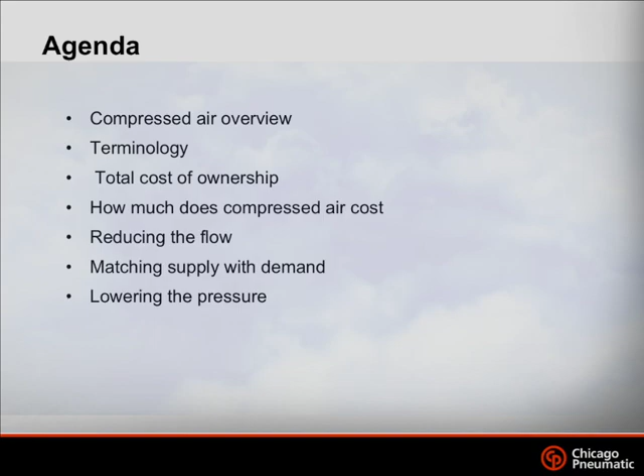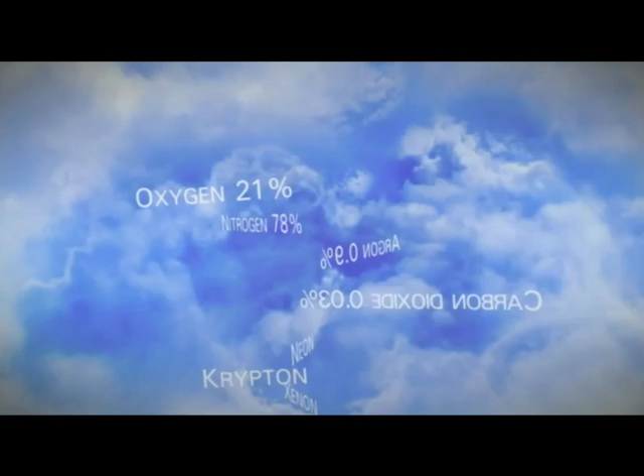Air is composed of 21% oxygen, 78% nitrogen, 1% gases such as argon and carbon dioxide, and minute amounts of trace gases. Together, they form air.

Because of their low density, gases such as air can be compressed, unlike liquids. Compression forces the air molecules closer together, increasing the density. Air pressure can be expressed in pounds per square inch, or PSI.

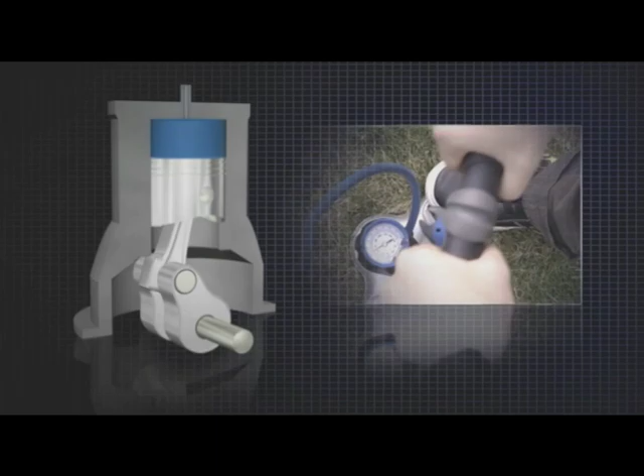The first way to compress air is by displacement. This means enclosing an amount of air and reducing its volume, like in a bicycle pump or a piston compressor. The air volume can be reduced in other ways as well, by rotating screws, gradually decreasing the space between them, or by tooth-type screws or scrolls.

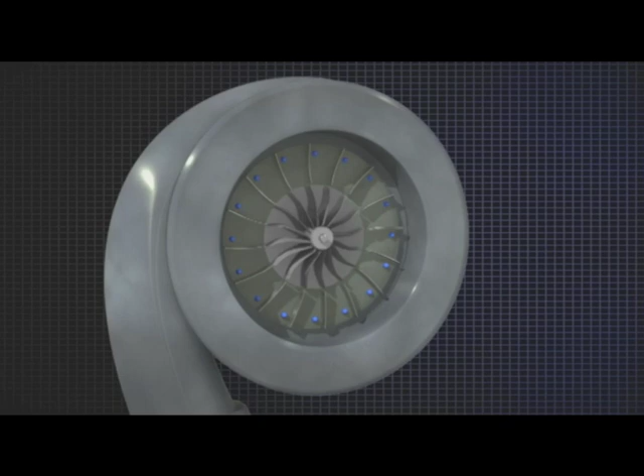A second way to compress air is dynamic compression. Air is drawn into a rapidly rotating impeller and accelerates. The kinetic energy is then transformed into pressure as the air slows down by expansion.

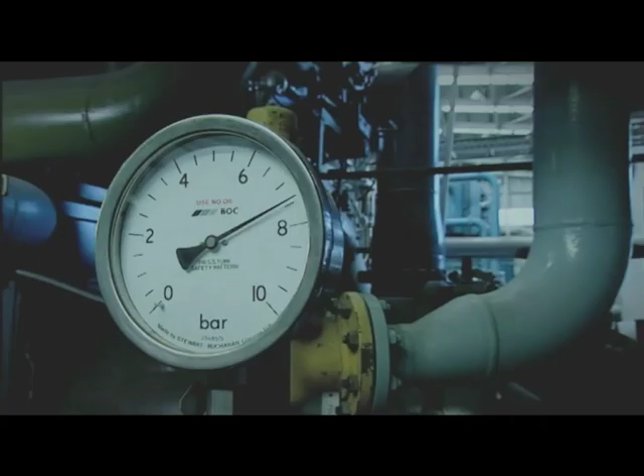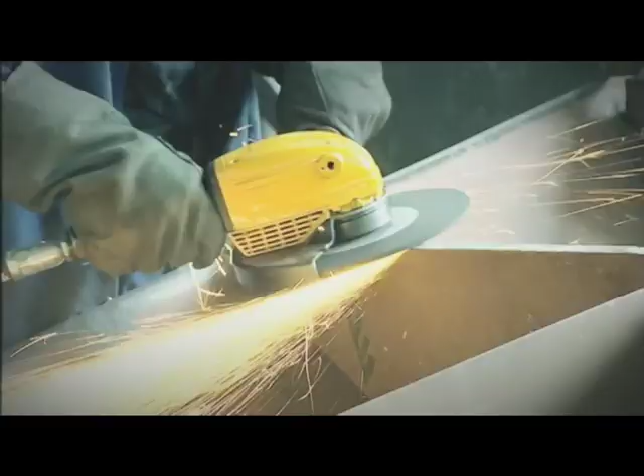Compressed air is a useful resource in virtually every manufacturing process. It can produce motion and exert force, such as in pneumatically powered tools or machines. We then call it energy air. It's a main power source on many construction sites, as well as in remote locations, such as drill rigs or on ships.

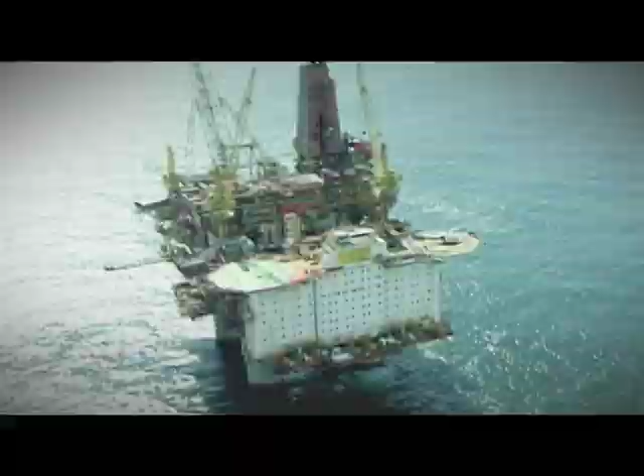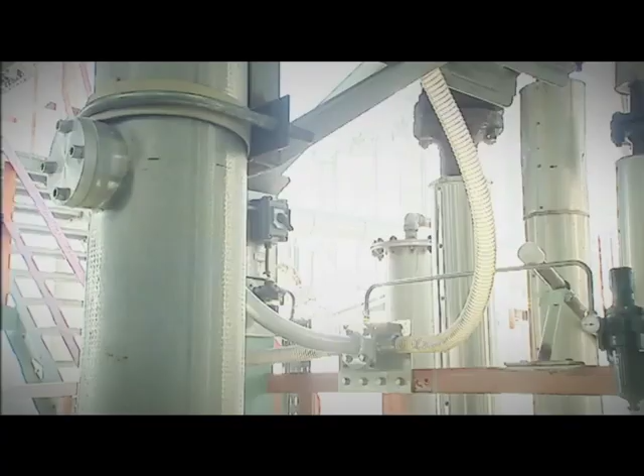It powers braking systems and opens train doors. When air is part of a production process, we refer to it as active air. It conveys tons of powders, pellets, and grains. It's used to maintain pipelines and provides the pressure for cleaning and paint spraying.

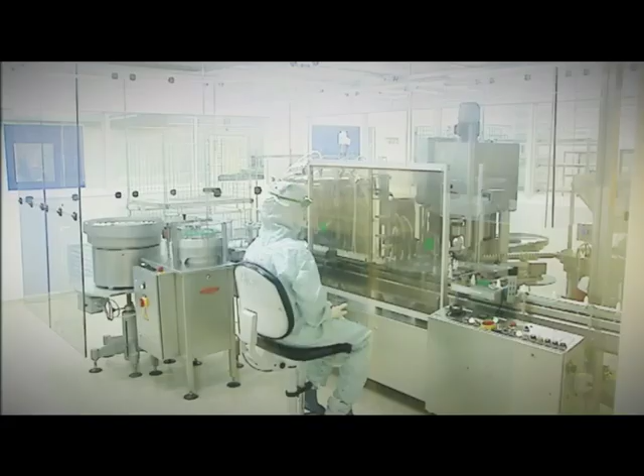Overpressure keeps out impurities from clean rooms and critical production areas. Compressed air is also a vital component in fermentation, combustion, liquefaction, and refrigeration. It's used for gas treatment or air separation. Because the gases forming air are not mixed chemically, they can be separated into oxygen, nitrogen, and argon.

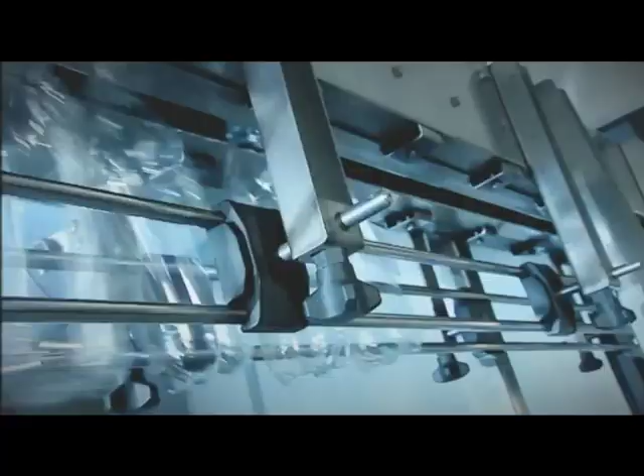Compressed air also provides oxygen to water purification and blows plastics into shape. It helps patients breathe and drives precision tools in a medical environment. In short, compressed air plays a part in countless products and services we enjoy every day.

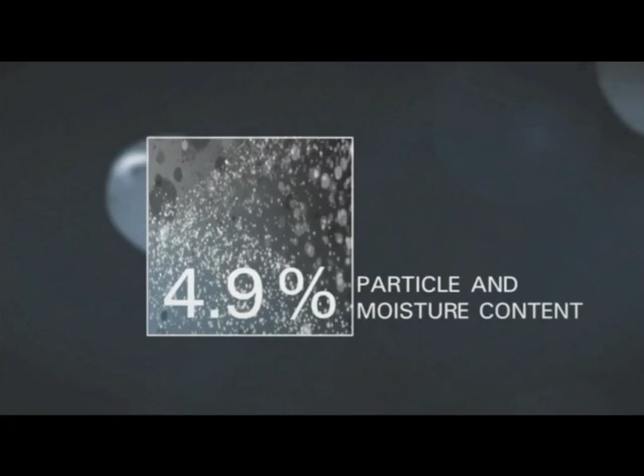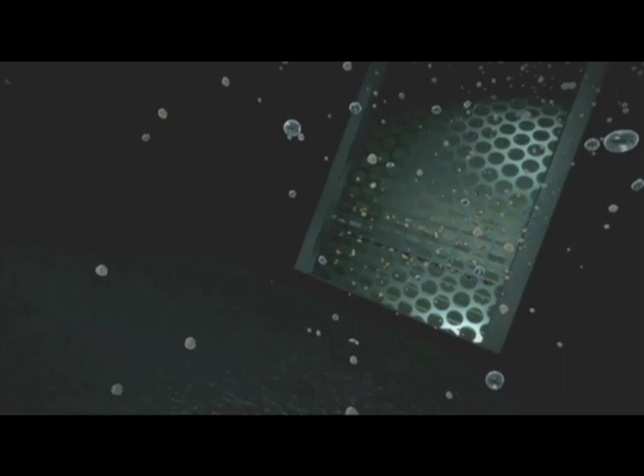Air has a capacity to convey objects. It also conveys very small components such as solid particles, microorganisms, and water vapor. As air is compressed, the relative particle content and humidity increases dramatically, causing water vapor to condensate, potentially leading to contamination of equipment or products. That's why sophisticated equipment accompanies the compressor itself, filtering impurities, draining the water condensate, ensuring clean, dry air of the highest quality.

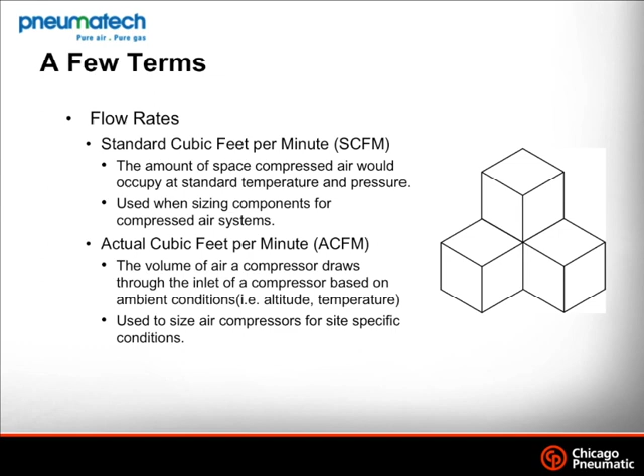But once that air enters the air system, it becomes standard. We convert that to standard cubic feet per minute, and that is how we size the other parts of our air system. We're also going to talk about pressure. System pressure is basically just the force exerted on a compressed air network to perform the needed task the system requires. So that's just fancy for we're using this air to run a sandblaster, or we're using it to paint some components. This is the pressure that we need.

Now, pressure drop, that is a term that we use when we talk about the difference between the inlet pressure at a piece of equipment and the outlet pressure at a piece of equipment. Usually when we're going to be talking about it here, we're going to be talking about the pressure drop across different air treatment devices. So whether it be dryers or filters or any other piece of equipment that you may need to prep the air, regulators, lubricators, that kind of thing.

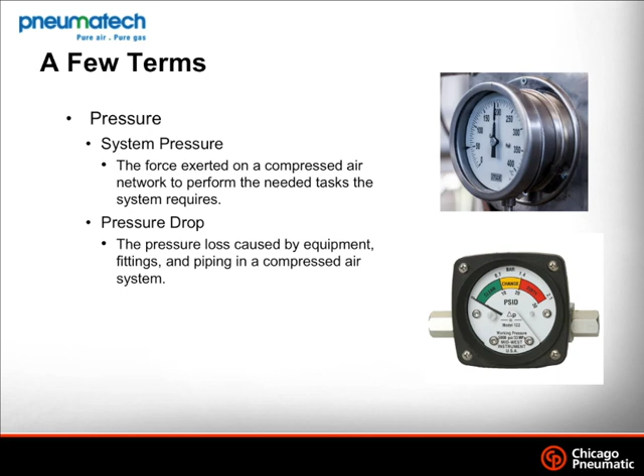Something a lot of people don't know about compressed air systems is that when we start talking about the total cost of ownership, so basically how much does it cost you to own this equipment for the life of the equipment, they don't really realize that 75% of the total cost of ownership is energy consumption. Only 25% then makes up your installation cost, your maintenance fees, and your initial investment. So a lot of times people are a little leery about spending money on energy-saving features because it's of course a little more expensive for those energy-saving features.

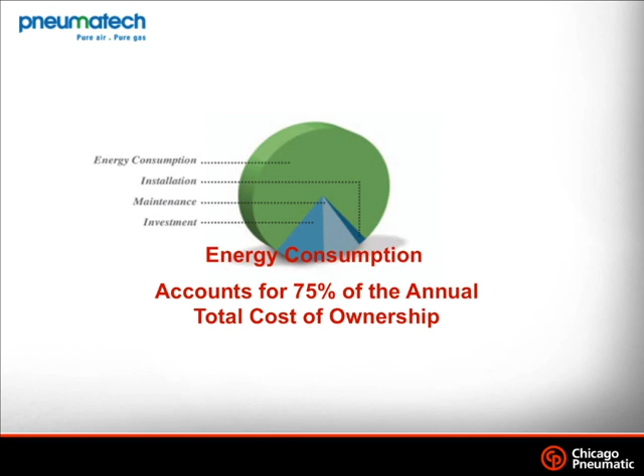But when you look at it over the long-term life of the compressor, you will find for not only the compressor but other pieces of equipment in that compressed air system that you can greatly reduce the total cost of ownership by investing in some energy-saving practices, as well as optimizing your compressed air system.

So how much does compressed air cost? Well, first we need to set some ground rules here. And while every compressor is different, what we're going to focus on are some rotary screw compressors, and as an average, you can use 4 cubic feet of air is produced for every 1 horsepower of energy that you input into that system. So for every 1 horsepower that you put into that compressor, you're going to get 4 cubic feet of air out. Now, just a conversion factor here, 1 horsepower equals about 3/4 of a kilowatt.

One other thing to keep in mind is electricity cost. You'll know your cost for your given area, but the national average right now is about 12 cents per kilowatt hour. It can be lower in some states, and much higher in others. The cheaper the energy, the less the savings, but especially where you're paying a lot per kilowatt hour, energy savings is a huge deal.

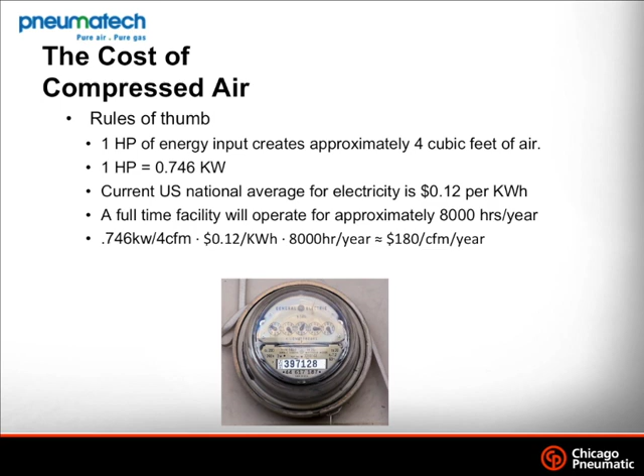In our example, every factory is different, but we're going to look at a factory that operates approximately 8,000 hours per year, and that'll be used for every example. If we crunch those numbers down, we get that each standard cubic foot of air costs you $180 per year.

Now that we've talked about flow, let's talk about pressure and how it affects the cost of your compressed air. We're going to focus on the 100 PSI range of compressors - 100, 125, 150, 175. For every pound of pressure you increase on that system output, you're using about 0.5% of system horsepower. So the higher the pressure, the more energy you need to add to that air.

So let's look at an example of a 100 horsepower compressor running at a discharge pressure of 150 psi. Let's say it's been running at 150 psi for a full year. You take a look at your system and decide you don't really need 150, so you drop it down to 125, and that works perfectly. That means you were running 25 psi higher than you really needed.

If we multiply 25 psi times 0.5% times your 100 horsepower compressor, you get the equivalent of 10 horsepower that was basically wasted. When we calculate the cost of that horsepower using the 12 cents per kilowatt hour we discussed earlier, you come up with approximately $7,200 per year that you spend running at that higher pressure. So you can see how dropping your pressure down in your system can really save a lot of money.

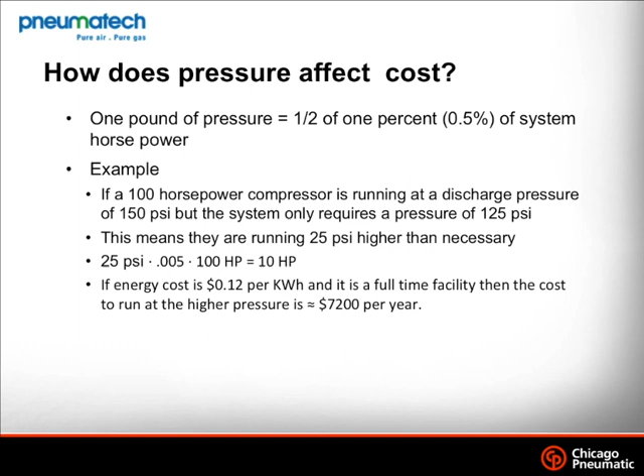So in a nutshell, the things you want to do to reduce your energy consumption are: reduce the flow, match supply with demand, and reduce pressure. Do all this and you will reduce the cost associated with running your compressed air system.

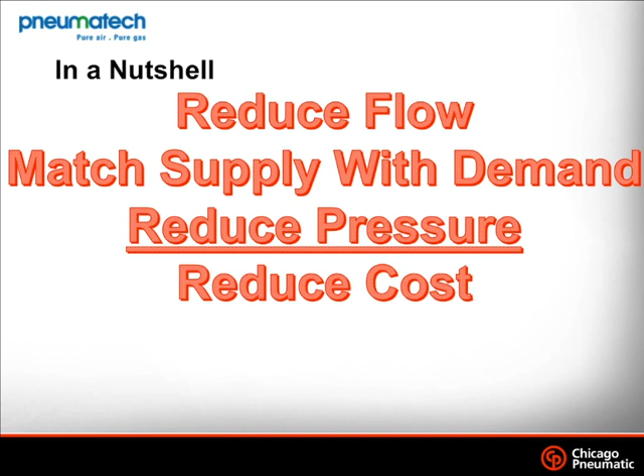As far as reducing flow goes, there are several ways to do that. The first is storage, which we'll talk about, flow controls, air treatment usage, and appropriate uses. I don't want to get too in-depth on appropriate uses because we could go all day about inappropriate uses, as well as leaks, and leaks are a big one.

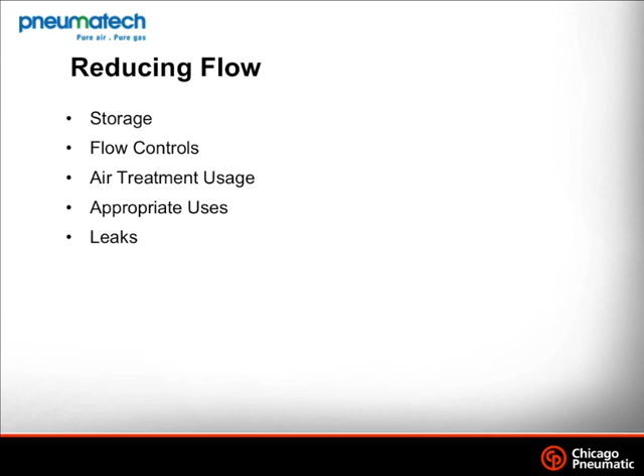The storage of a compressed air system - a lot of times people think of just the air receiver, but it's more than that. It's also the compressed air piping, so your entire system comprises your storage. Having the right amount of storage can actually reduce the system horsepower that you need. If you don't have enough storage, you may be running a higher horsepower than you really need. Adding a receiver and lowering your horsepower could save you a good bit of money.

Pressure fluctuations are also a problem - they can damage equipment, your products, and your processes. Having storage in there reduces pressure fluctuations and also protects your compressor because it keeps it from short cycling. If you're not aware, short cycling means the compressor is loading and unloading rapidly, or starting and stopping at irregular intervals. A good rule of thumb is 3 to 4 gallons of storage per CFM.

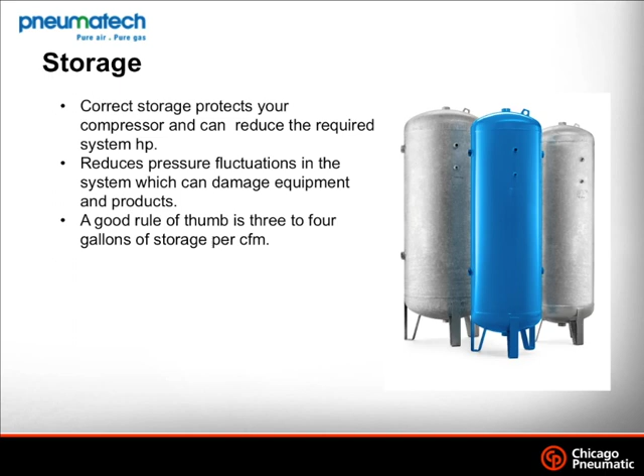That's a good way to get started, but there are other ways to determine this, especially if you do an air audit, which looks at your compressed air system, what you're using that air for, and the pieces of equipment in that system. You can then determine the amount of storage you really need for your system. Now, flow controllers - a flow controller is essentially a high flow regulator.

It's a valving system that maintains downstream pressure. It works just like a typical regulator you're used to seeing, but much faster. We're able to control within plus or minus half to plus or minus 1 psi, depending on the type of technology used, downstream pressure, regardless of changes in flow.

Let's say you've got somebody downstream and they fire up a sandblaster. It's using a lot of air. Now your demand is increased incredibly, really fast. So you need to add more air. Well, these valves will react really quickly, and it'll keep that pressure in that system within plus or minus 1 psi of your set pressure.

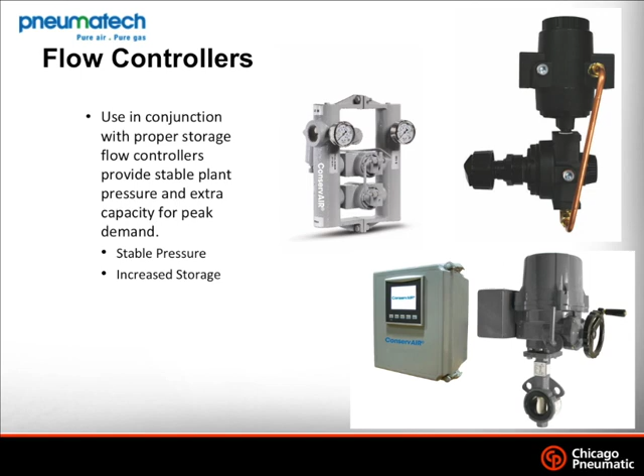Let's say you need to keep it running at 80 psi. You can have it set to 80. It'll keep it anywhere from 79 to 81 psi, very stable and with no gradient.

So a couple problems with fluctuating air pressure we talked about a little bit: inconsistent equipment performance, especially if you've got equipment that's very sensitive to changes in pressure, it can have an effect on your performance. Variable product quality—if you're using compressed air for your products, it can change the quality of your products based on system pressure.

You will have higher scrap rates if you've got your pressure bouncing around all over the place. You'll have increased maintenance costs due to equipment failure—premature equipment failure, which leads to those increased maintenance costs. Higher operating costs because you're running at a higher pressure than a low pressure. Interruptions in production schedules as well.

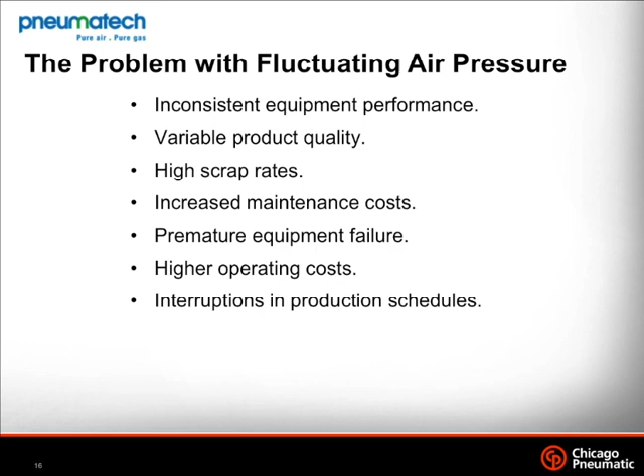So in a typical system, you're going to have this pressure gradient throughout the system. Mass stays constant, the density decreases, and the volume increases as that pressure drops and goes through the system.

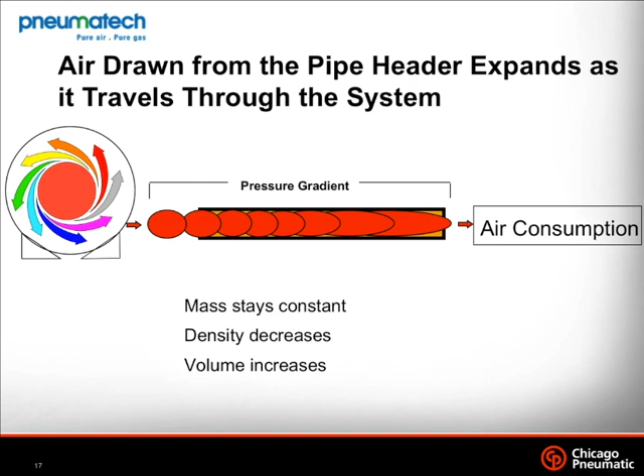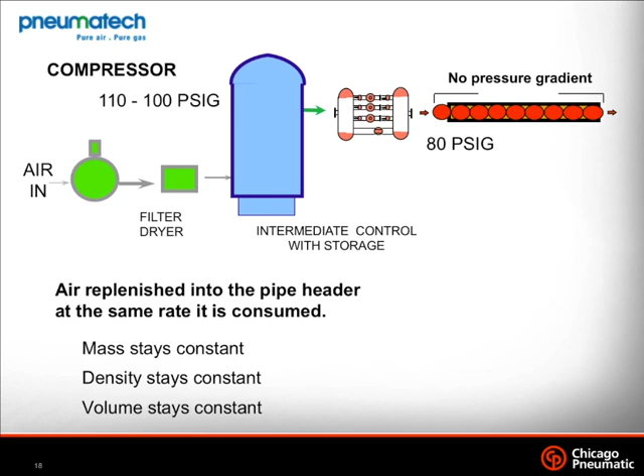So the flow controller is reading downstream pressure, and you're maintaining that 80 psi. It's letting that air out at a set rate to keep that 80 psi pressure very constant. Now, the other thing this does is it creates storage, and we'll talk about that in a second.

Right now, if you've got it set up this way, you're setting it to 80 so that you maintain that 75 psi for that one piece of equipment. But what you could also do is have smaller flow controllers on these other pieces of equipment in order to bring the pressure down to what they require.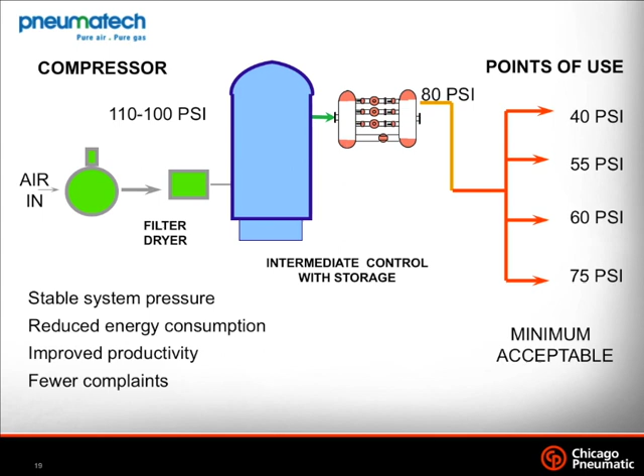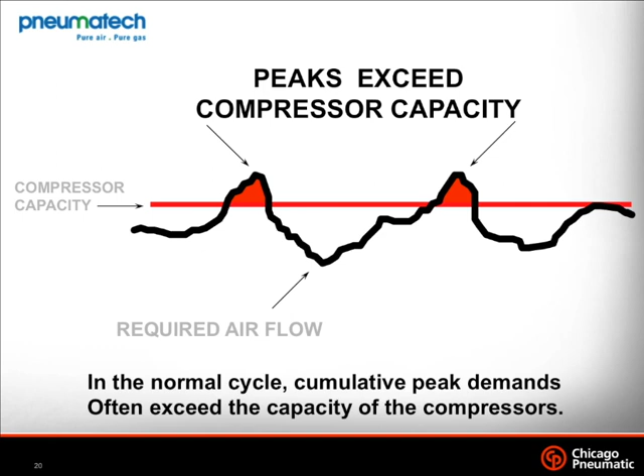Our compressor capacity is not quite enough, so we're going to have to make it up with storage—hold back some of that pressure. Like in our previous slide, we had 100 to 110 psi in that tank at any given time. Well, because we're only letting it out at 80 psi, that means we've got a little bit left in reserve, and we can use that reserve storage to make up for those intermittent demands.

One prime example of this would be: let's say you have a dust collection system in your factory or manufacturing facility, and every now and then it has to knock the dust off the bags. They also call it a bag house. So it uses a lot of air, but only for a short period of time.

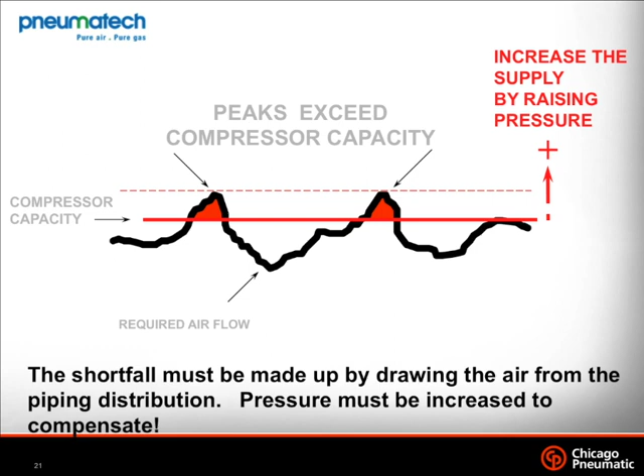Well, this is an ideal situation where you can use the Conservair flow controller in order to keep the total horsepower required to a minimum, so that you just use storage to make up for those periods where you're using a lot of air, but only for a short period of time. So this is basically how it works.

So if we look at a steady state situation, or when you just put an air receiver into a system, air's coming in at a certain pressure and it's going out at basically the same pressure. There's going to be a very slight difference going out, but you do have pressure drops throughout the system, which will cause a little bit of storage.

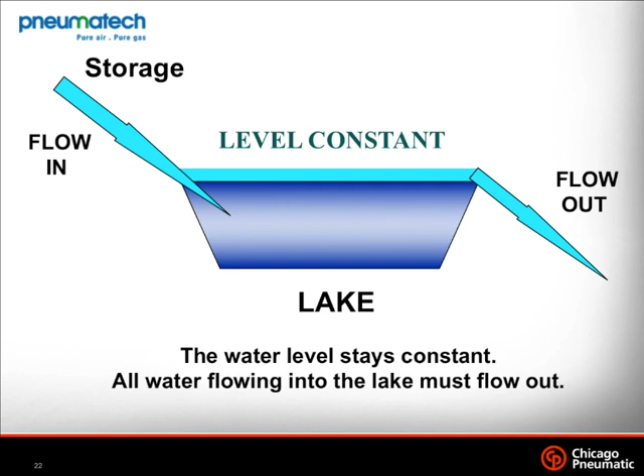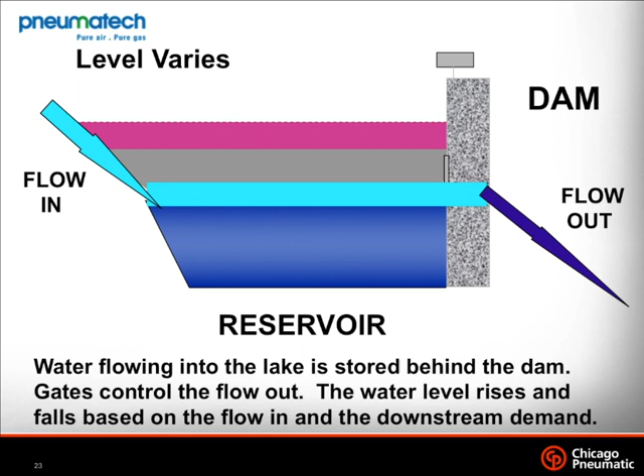But now, when we add our Conservair flow controller, we're creating a dam. So what we're doing is we're letting the pressure inside that vessel rise to that 100, 110 psi range, and then we're letting it out at 80. That means that during those peak demand areas, the area between the purple line and the blue line is all storage that we can use for intermittent demand situations.

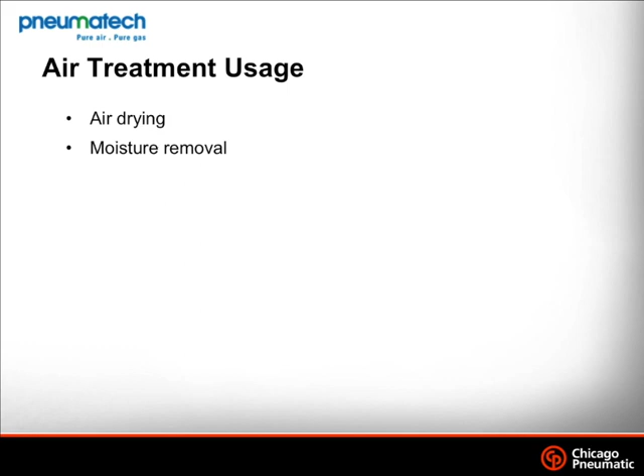So another way we can reduce flow is air treatment usage, so air drying and moisture removal. We'll get into depth on these, but basically this is just what you're doing to treat that air before you use it. And we'll see that there are several ways that air gets used that can actually be eliminated or reduced significantly. So the first one we'll look at is air drying.

Most places will have some type of water removal system other than just an aftercooler and a water separator. The most common way that water is removed from a system is called a refrigerated dryer. What a refrigerated dryer does is it cools that air down to around 40 degrees, and then the moisture coalesces out of it, just like the condensation on the outside of a soda can after you pull it out of the refrigerator. It's going to do that exact same thing, but then it's going to run it through a moisture separator, and it's going to mechanically separate that water out of the airstream, and the air continues to move on.

Now, that's mostly for people that just don't want any liquid water in their system — I just don't want any water filling up my system — which works fine. But sometimes you've got situations where, let's say, it gets too cold in that particular location. Say the pipes run outside and it gets below 40 degrees. So you really need to get the dew point lower, and the dew point is a measure of the amount of moisture in the air.

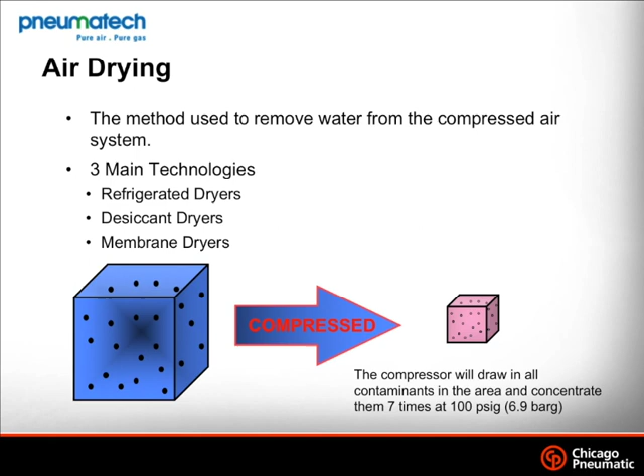So for that particular instance, you need either a desiccant dryer or a membrane dryer. Now, we're not going to hit too much on membrane dryers today, but we will focus on desiccant dryers. And desiccant dryers need compressed air in order to regenerate the towers. So when we talk about desiccant dryers, these are dryers that are used in applications where moisture content is going to be a lot more important to the user than free water in the system. That means instead of liquid water, they're worried about the moisture content in the airstream itself, suspended within that airstream.

Now that can be for a few different reasons. It could be, for instance, a customer that's creating microchips — they need to have really dry air, they don't want to be building microchips with wet air. The other thing is it could be in a cold weather situation or a refrigerated situation where you have compressed air running inside of a freezer, so you need to remove a lot of that moisture so you don't have any condensation and thereby ice forming.

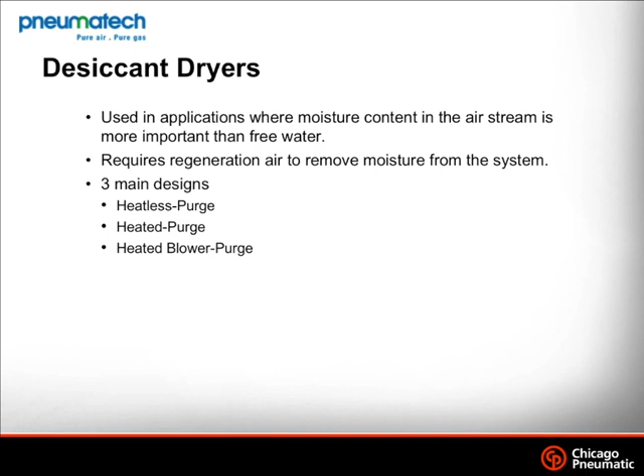So we have three different main designs when it comes to desiccant dryers. We have a heatless purge, which basically just uses compressed air peeled straight off the outlet of the dryer in order to regenerate one of the towers. We have a heated purge, which does the exact same thing, but instead of just putting it straight through the tower, it actually heats that air up, gets it nice and hot, and helps remove that moisture a lot more efficiently. And then we have a heated blower purge, which is going to actually strip the moisture off the beads using air that is fed through a blower and up through the heater. We'll talk a little bit more about that here in just a second.

So the three different technologies we're going to look at today are heatless, heated, and blower purge. Now, each one has its own purge consumption, and while there are different technologies out there, different manufacturers, different marketing, the average that you'll see for a heatless dryer is around 18%.

Now, that's for a minus 40-degree dryer at normal conditions. Of course, you can have some differences, but for the sake of argument, what we'll do is look at 18% on our heatless.

We also have 10% on heated, and what that does is you've got purge air that flows through a heater, and that hot air is able to remove the moisture from the desiccant inside the tower much more efficiently than

unheated purge air. You also have a blower purge style dryer. Now, instead of using compressed air as the purge air for the majority of the cycle, it uses ambient air that runs through a blower, goes through a heater, and then regenerates that tower.

Now, you do need to cool the tower back down, and you can't use the blower to do that, so that is where the average 2% comes from, when we use a little bit of compressed air toward the end of the cycle to basically cool down that tower so that it's ready to dry air again once we've switched back over to that tower.

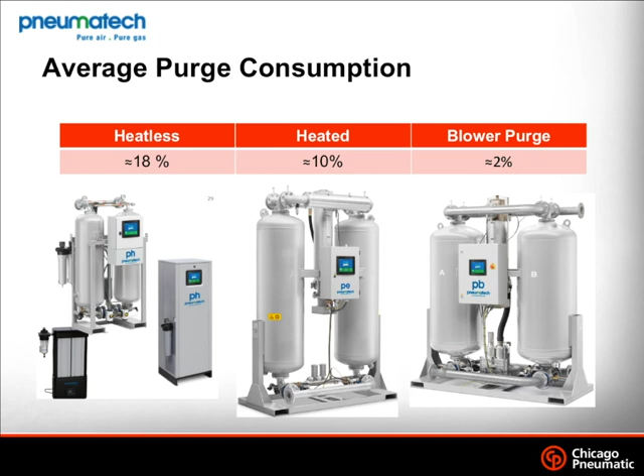So if we look at an example of a 500 CFM system, we're going to be looking at 8,000 hours per year, so full-time installation, 12 cents a kilowatt hour. So if we look at a heatless dryer, if you take that 500, take 18% of that, that's around 90 CFM of purge consumption per year.

So that equates to about 22.5 horsepower needed for that 90 CFM. And that 90 CFM is only used to regenerate that tower, so it's not going to do any work. It's just regenerating the tower, so that 90 CFM is just going back into the atmosphere.

That costs you about $17,000 per year. And so if you look at a 5-year return on investment, you're paying $85,000 over 5 years. Yes, some of these energy saving options are definitely going to be interesting to you if you're interested in a return on investment that quick.

Now, the heated dryer, it also has a heater involved with it. So if you'll notice in these calculations, not only does it have the 50 CFM purge consumption, which is 12.5 horsepower power input for that, we also have approximately $3,025 to run the heater for the year as well.

So the total cost to run a heated style dryer is $12,525 a year. So you're looking at a savings of around $22,375 over 5 years. So just by switching to that heated dryer, you've saved a lot.

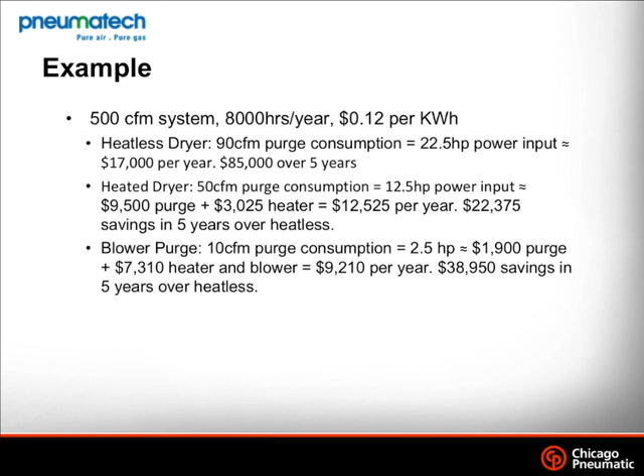Now, when we look at other ways that air treatment can actually remove air from the system, another very big one that people don't think about a lot are drains.

Now, when we look at a standard timer drain, what you have on it is 2 knobs. One is going to be for the interval, that's how often do I want this valve to open, and the next is going to be duration, so how long do you want the valve to be open.

Well, if you're using one of these and you're only getting water out, that means that some water is being left in the system, which means that you're actually accumulating water. So you actually have to set them where a little bit of air does come out. And if you're setting it every day and really fine tuning it, you can get pretty good on these.

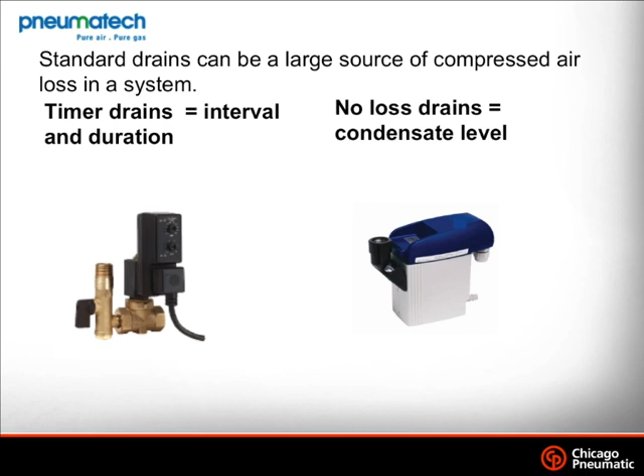Most of the time, people set their drains so that when there's no moisture in their system, a good bit of air comes out along with that water. What you can do instead is switch to a no-loss condensate drain. This measures the water level, and when the condensate level reaches a set point, a sensor inside opens a valve to let the water drain out, then closes it before all the air escapes. So no air is lost, only condensate gets pushed out of your system. It's a really good way to save money on air loss and reduce the flow going through your system.

Now let's talk about appropriate uses. A very big user of flow in compressed air systems is inappropriate use. There have been instances where people poke holes in hoses to get a cooling effect by blowing air on themselves. That's very costly, especially once we look at leaks. Using compressed air to blow off a work surface is another example, when you could do it just as easily with a blower. We could go on for days about inappropriate uses, but you really need to use compressed air only for equipment that truly requires it. If you don't require compressed air, use another technology, like a blower or electronics, instead.

So about leaks, we've got a couple different hole diameters here. Looking at a 100 psi system, if you increase the pressure, the flow rate coming out of that hole increases too. Just a 1 millimeter hole in a 100 psi system will cost you about $404 a year. So in our earlier example, if somebody pokes a bunch of holes in a quarter inch air hose, that's a lot of 1 millimeter holes adding up. You're basically throwing money away from how much air is wasted on your electric bill every year. A 3 millimeter hole will cost about $4,000 a year, a 5 millimeter hole $10,000 to $11,000, and a 10 millimeter hole about $43,000 a year.

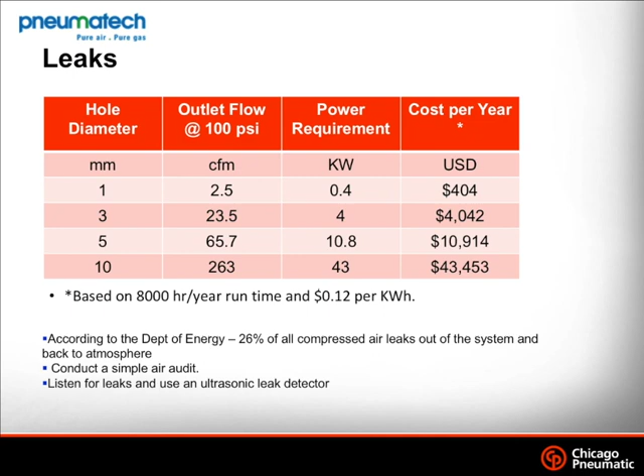You can check for leaks by doing a simple air audit — comparing how much we should be using versus how much we're actually putting in. You can also listen for leaks using an ultrasonic leak detector, which is basically a listening device. You pressurize your air system, walk around following it, and you can actually hear where the leaks are. Now we'll look at matching up our supply with our demand.

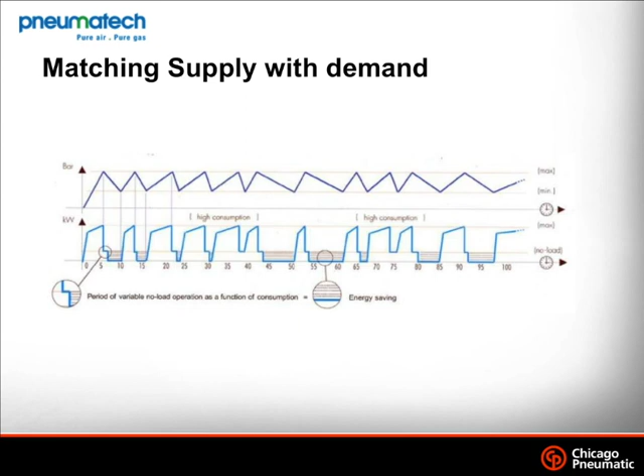So how much are we using, which is our demand, and how much are we producing, which is our supply. There are many types of compressors — piston compressors, scroll compressors, centrifugal compressors — but today we're focusing on oil-injected rotary screw compressors, though some of this argument applies to the other types too. An oil-injected rotary screw has two helical rotors, a male and a female, working in opposite directions. It compresses the air within those channels, decreasing the size, which also increases the pressure.

So the oil part of oil-injected screw is that it's injected into the inlet, and it's used for cooling, to wick away some of that heat, for lubrication, to keep the rotors spinning properly, and then also to seal the gaps between the rotors.

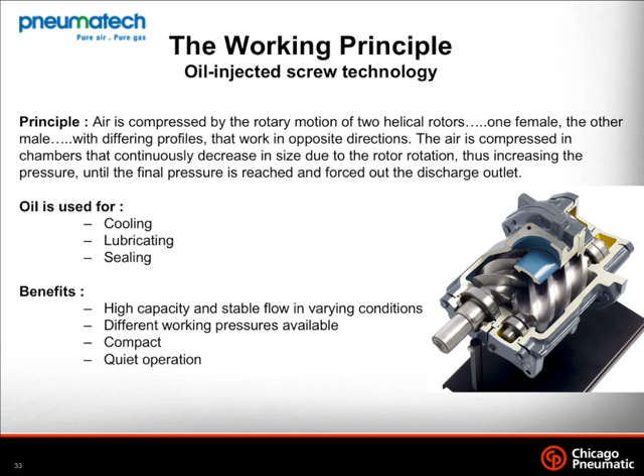So it's got a high capacity and stable flow in varying conditions, with different working pressures available. We typically sell anywhere from 100 psi up to 175 psi. They're very compact and have a very quiet operation, especially compared to piston compressors.

So we're going to look at the 6 basic types of compressor controls. When we talk about compressor controls, what we're talking about is how do we limit or adjust the flow of air coming out of that compressor.

The first type is start-stop, and you're probably familiar with this from your piston compressor in your shop. When you first cut it on, say starting from 0 psi, you turn the compressor on and it starts running. Using our example of 100 to 110 psi, it'll run all the way up to 110, the compressor will then shut down, and will not start up again until you drop down to 100 psi.

Then we also have load and unload controls. When we talk about load and unload, we cut off the flow to the inlet of the compressor. For a rotary screw, you'll close an inlet valve that restricts the air, so no air can be pulled in — that's an unloaded condition. As soon as you open the valve, air flows through and we're providing air to the system — that's a loaded condition. Using our same example, it will load at 100 and unload at 110.

Modulating: with a modulating compressor, we're trying to match supply with demand by restricting the airflow coming into the inlet. As demand decreases, we're basically choking off the inlet of that compressor to limit the airflow going downstream. It's really just to match supply with demand, but the energy consumption is still relatively the same.

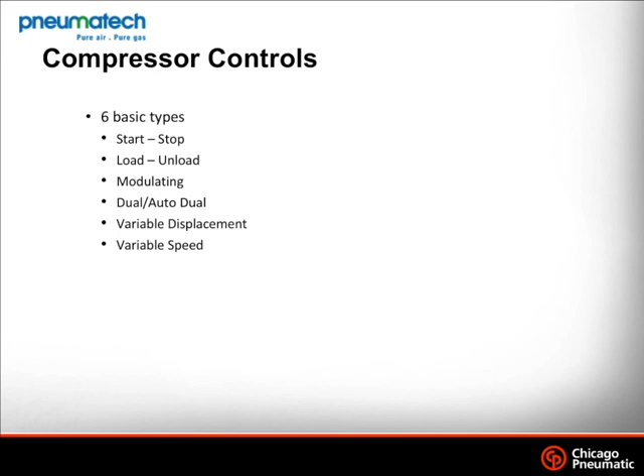You also have variable displacement, which changes the size of the compression area inside your compressor. You can have spiral valves or poppet valves, which just changes how big your compression area is inside the compressor. Then we have variable speed technology, which is the one we'll be looking at the most today. Variable speed speeds up or slows down the compressor based on the amount of air you're requiring at that point in time.

All right, so if you take a look at a typical load and unload machine or auto dual machine, the first thing we'll notice — let me pull out my pen here — is this is the start. What we're showing on top is the PSI, and starting here, these are the kilowatts. When you fire up the compressor, pressure starts to build. You jump up in kilowatts real quick, but as the pressure starts to rise, it'll slowly rise up, because as you increase that pressure, you're increasing the power input. Once you reach this line, you've reached your set point. The compressor will then unload, and the power drops down to the unloaded power — so this is what you'll see right here.

That's that unloaded power - you'll see that little stair step, which is where the compressor is running on a timer unloaded. Once it runs for a set period of time, it will unload, basically shutting down the compressor. When we reach this point, our pressure has dropped to our load point, so we load back up and repeat the process all over again.

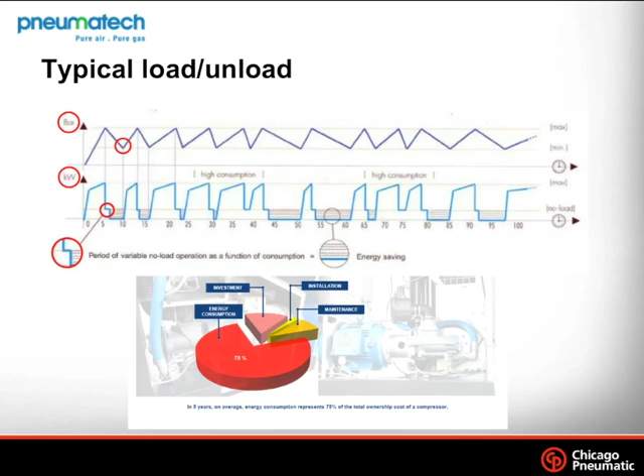With this typical load-unload machine, you're going to have an energy consumption that consists of about 75% of your total cost of ownership. So now we'll go and look at a variable speed drive - let's take a look at the variable frequency speed compressors now.

They match the compressed air supply with the system demand using a variable frequency drive. The controller on the compressor reads the outlet pressure. Let's say we set our system pressure to 105 psi. As pressure starts to drop, the controller instructs the variable frequency drive that we need to speed up, so it speeds up that motor in order to maintain system pressure.

Now, if the pressure starts to rise over that setpoint, the controller will tell the variable frequency drive that we need to slow down. Most of our compressors are going to be able to slow down to within 20% of full load capacity. So if somebody stops using air, it'll ramp all the way down to that 20% mark, and then it will finally shut down and wait until you start to use some air.

The importance of this is that we're matching that supply with the demand, and we're saving about 25% of the total cost of ownership over a regular load, no-load compressor. That really depends on the size of your compressors, but it can save you a tremendous amount of money.

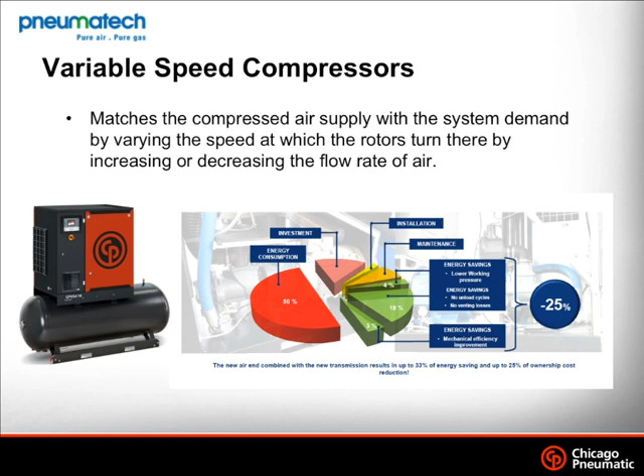Real quick, I'm going to talk about cycling air dryers. The thing about cycling air dryers is you're varying the energy input in order to treat the air based on flow and ambient conditions. Most refrigerated dryers are going to be the non-cycling type - represented here in this graphic. A standard non-cycling dryer runs all the time, from the time you turn it on to the time you turn it off when you leave the building at night. A cycling dryer will actually turn off and on based on ambient conditions.

If it's a nice warm day, you don't need to cool the air quite as much because you're removing enough moisture to keep it below 50% relative humidity, so you'd be able to turn that dryer off and on. It also has the ability to stop based on flow - there's a flow switch in there, and if the flow going through the dryer stops, it will shut the dryer down, so you're not using any energy because you're not using any air. A non-cycling dryer, if somebody forgets to turn it off, even though you're not using any air, it's going to continue to sit there and run.

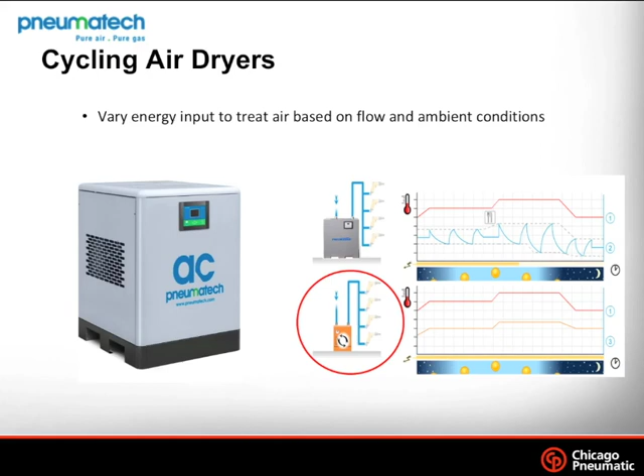Okay, the final thing we're going to talk about as far as reducing your cost on your compressed air system is reducing the pressure. First you want to determine the minimum pressure required - that's going to determine what kind of pressure level you need to set your compressor to. You need to look at your different pieces of equipment in your facility, and based on that, you can determine the system pressure you have.

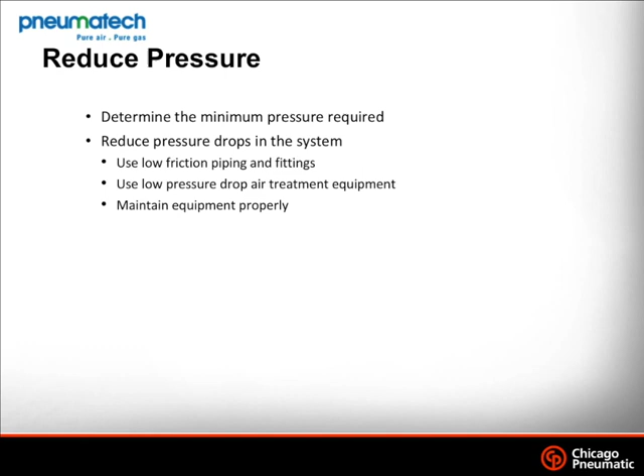In order to supply that piece of equipment, you do have pressure drops associated, so you're not going to be able to run at exactly the same pressure as that equipment - you'll need to run a little higher. But to reduce cost, you can reduce the pressure drops in the system a few different ways: use low friction piping and fittings, use low pressure drop air treatment equipment, and maintain your filters and equipment. If you don't maintain them, the pressure drop will increase over time and can cause a lot of problems with your system.

When it comes to filters, filters are a big thing. They're in almost every compressed air system, and you want to look at a few different things. You want to make sure that you're removing the contaminants that you need to for your process or your piece of equipment. A lot of times they will specify what micron level you need to achieve for that piece of equipment, so we sell 1 micron and 0.01 micron types of filters.

There's either particulate, which gets rid of any kind of dust particles or other small solid particles, or you also have coalescing filters. The coalescing filters remove oil. And you also have adsorbing towers or adsorbing filters, and these are impregnated with carbon to remove oil vapors.

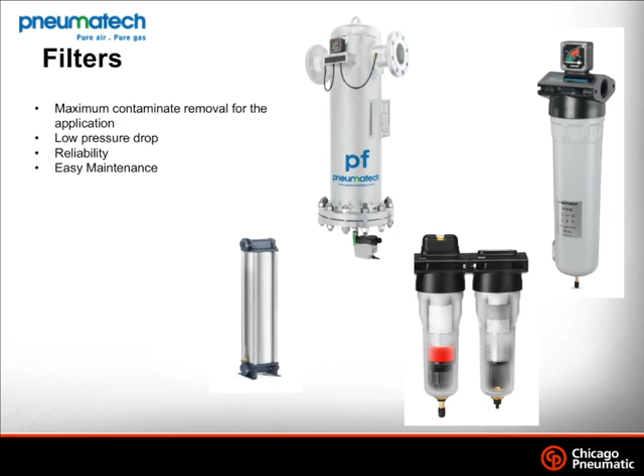The other thing you want to look for after you've gotten the right filter is a low pressure drop across that filter. In Pneumatech filters, we have a very good pressure drop, both dry and wet. You want to make sure that they're reliable so that they're going to last for a good period of time, and you want to make sure that they're easily maintainable. You want to be able to change those elements out with not a lot of effort.

The fittings are very easy to use, with simple tools. A single person can install a system with this instead of having multiple people for that heavy pipe. It does have a very low coefficient of friction, and that's going to reduce your pressure drop both inside the pipe and through those fittings.

And it's incredibly reliable and leak resistant, so it's going to prevent those leaks from happening. And the good thing is if you do get a leak, it's very easy to fix. It's not nearly as hard to replace as conventional pipe. Our particular brand is AirNet. It is a very good piping system, and I highly recommend it.